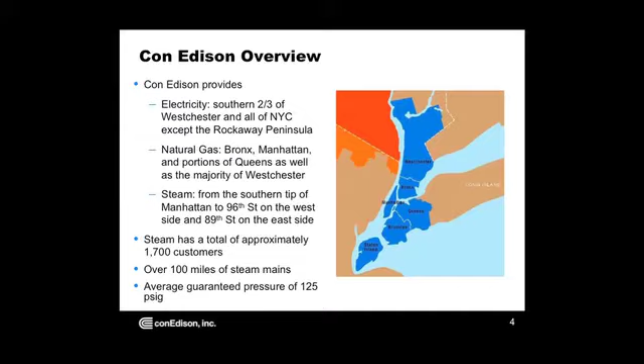We have over 100 miles of steam mains running throughout Manhattan, and we supply steam at an average pressure of guaranteed of 125 pounds gauge. So that gives you an idea of what Con Edison does, and just a little bit of basics about district energy in Manhattan. It's a large system. It spans quite a wide expanse through Manhattan, and some of those areas of steam mains are located, obviously, in areas on the extremities of the island. And as you can see from this image, there's quite a bit of water surrounding us from all sides that has the potential to impact us at varying flood levels.

So before I get to the flood-prone areas, just to give you an idea of our generating capacities, this table summarizes our stations. So we have the 59th Street station with a capacity of just under 1,400 M-pounds per hour, which is about 12% of our system. 60th Street station, which is part of the 74th Street complex, 720 M-pounds per hour at about 6%. 74th Street station at around 2,000 M-pounds per hour. That's about 17% of our system. The Brooklyn Navy Yard at 920 M-pounds per hour, about 8%. East River Station at a little over 5,800 M-pounds per hour, coming in just over 50% of the system.

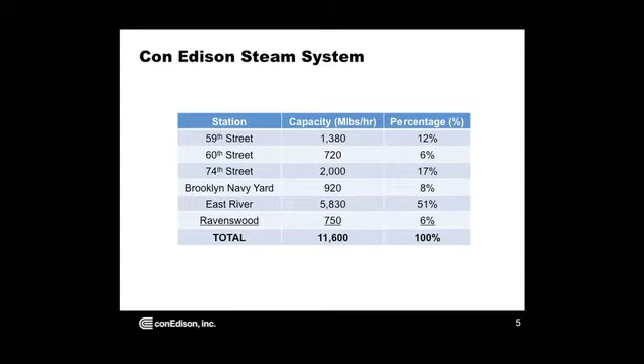And Ravenswood Generating Station at 750, which is about 6% of the system. In total, we have 11,600 M-pounds per hour capacity of generation. And this is going to become important later when we show you what the impact was to our system and what we took out of service preemptively, as well as what was impacted by far greater than predicted flood levels in our generating stations.

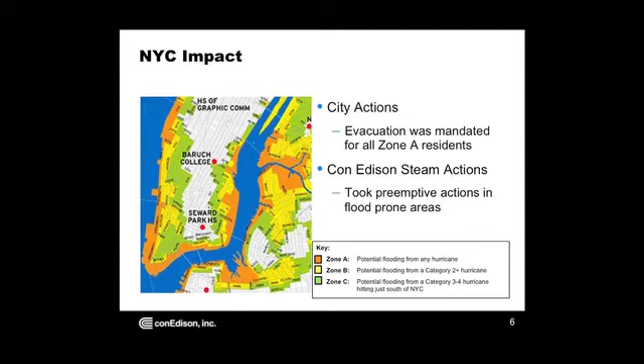In terms of ourselves, Con Edison took some preemptive actions in these flood zones that we'll talk about more in detail shortly. So right now I'm going to hand it over to Rob Boyle to talk about some of the actions that we took in the street, and then Mike will talk about the actions that we had in some of the plants.

All right, so as per the Con Edison corporate procedure, we begin talks 120 hours in advance of any potential storm that may hit the area. In fact, I remember, I think it was the Thursday before that, we were actually on a conference call with some folks from Veolia up in Massachusetts and also down in Philadelphia. And at that time, we knew it was coming, but we didn't know where it was going to hit, and everybody was kind of scrambling to develop their own plans.

So we start discussing those plans in advance, but as it looks like the track is going to be heading into us, we start taking the necessary precautions that are identified in our coastal storm plan. Fortunately, we had a good experience the year before with Hurricane Irene, where we had to enact our coastal storm plan, so we were able to go through it and use the lessons learned from Irene as part of this preparation.

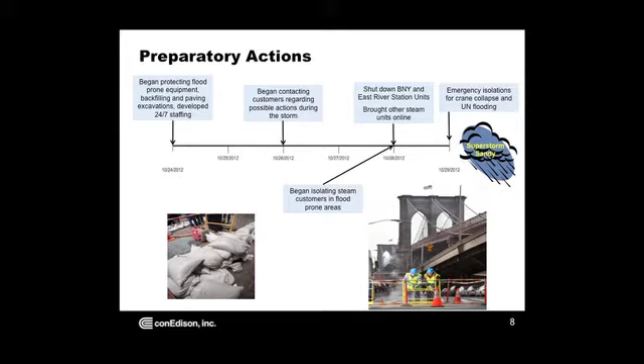So just to take you into it, this is all of our preparation. Here we are. We've sandbagged ourselves in. We've got folks throughout the stations and in distribution staged with trucks at ready locations in case we need to drop portions of the system. We're watching the tides come in. It's about 8 or 8:30 at night, and the surge just keeps coming, and it just keeps coming. So let's talk about what actually transpired with this storm, right?

Let's talk about some statistics. We're calling this a superstorm for a reason. Superstorm Sandy wasn't just one storm. It was a combination of multiple front systems that, when weather folks talk about it, it literally is a perfect alignment of conditions that allowed these two storm systems to merge and settle and just sit right over top of the New Jersey, New York, New England coastline.

At its widest, it spanned nearly 1,000 miles. It was the largest Atlantic storm on record. We had sustained winds of 64 miles an hour at LaGuardia Airport. That is very significant. There were peak gusts of 90 miles an hour on Staten Island. Who would have ever thought that?

And remember, I mentioned what the forecast had been for the storm tide or the storm surge. They had been predicting at a maximum that we would hit 12 feet, and that was the highest that we'd seen, maybe just a hair over. The actual storm surge hit a little over 14 feet. That's in excess of 2 feet greater than what was anticipated.

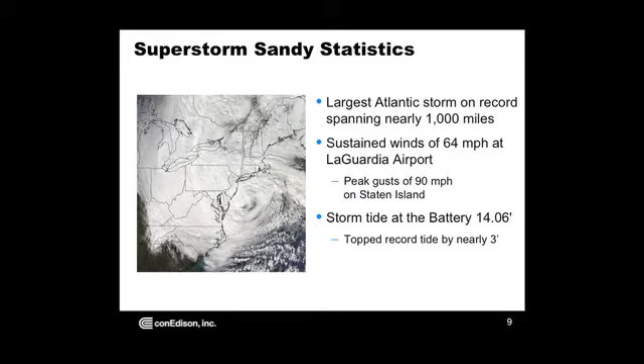So let's talk about the impacts just in general. Let's back up and look at Manhattan as a whole. There were 11 electrical networks impacted as a result of the storm in Lower Manhattan. It took out everything below about 42nd Street. Tunnels were flooded. There was debris all over the harbor. It was floating up into the streets, and we'll show you that in a minute.

One of the most significant impacts for transportation for the city was the Brooklyn Battery Tunnel, which connects Lower Manhattan into Brooklyn. It was completely submerged. Millions of gallons of water flooded this tunnel, and it stayed that way for quite some time. In fact, it was weeks before this tunnel was reopened to public use.

From our perspective, from a steam perspective, the impact to the electrical networks Rob mentioned in Lower Manhattan was significant to us because of the effect of loss of power on our customers; there's a potential for loss of condensate pumps. So that was a concern to us as well, and we'll talk about that in a minute. But let's look at just some more general photos of how the city was impacted.

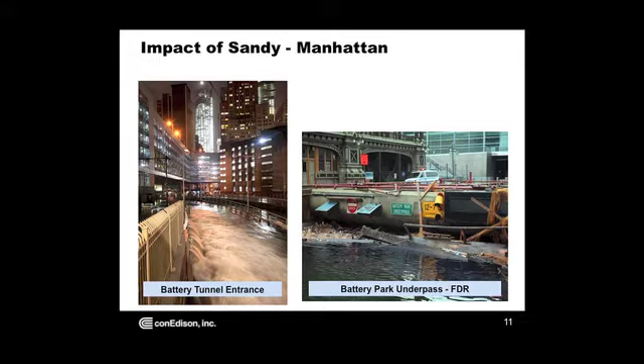The battery tunnel is in Lower Manhattan. This is primarily where the main flood areas were, if you noticed from the flood maps earlier. Here you could see just water gushing and pouring into the tunnel entrance. This Battery Park underpass is a method to traverse from one side of the island down there to the other. That was completely flooded out. Unless you had a scuba, you weren't going in there.

Can I just chime in? Go ahead. Yes, so with all this devastation, we also had to be very sensitive and work with our employees. There were restrictions getting in and out of Manhattan. Gasoline was a big issue. So our folks who went home at night, they had a battle with either having somebody at home get gas, 5-gallon gas cans, whatever it may be, or wait on gas lines to get back to work.

So, you know, you see all this devastation, the impact to our employees, and then a lot of our employees had damage at their homes themselves, struggling with phone calls, contractors, tree removal services. So at every level, this impacted everything that we do and what we would consider normal. So I just wanted to chime in about the impact to our employees as well. Thanks, Ed.

And so now we want to focus in more on steam specifically, right? That was kind of a general impact to the area, to the region. We didn't even touch upon the devastation in the shore of New Jersey. There was significant impact to Manhattan, which is where we're primarily focused because the steam system is only in Manhattan, but there was devastation in Staten Island, in southern Queens, in Long Island.

There were areas that were literally destroyed. And if some of you have seen CNN or any of the news media outlets, you've seen photos of just homes decimated. But let's move in. So closer into the steam system, our impact primarily was in terms of shutdowns and isolations and return time, and cleaning off equipment that was impacted by the flooding.

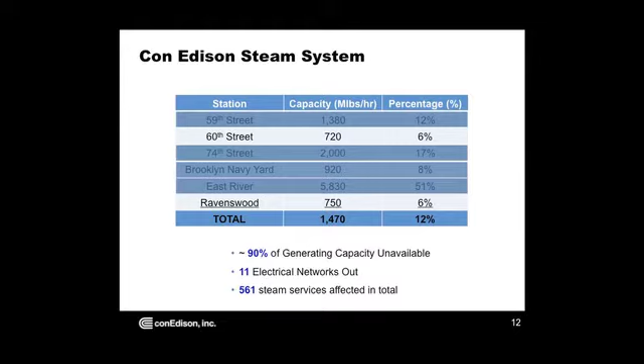In all, we also took measures to isolate a much larger portion of Lower Manhattan. And by the end of the day into the next, as we were recovering out of the impacts of the storm and assessing the system, we had 561 steam services affected and isolated as a result of this storm.

As the 74th Street plant and the 59th Street plant were losing their generation ability the night of the storm, we had plans in place with crews manned at certain valves to drop additional sections of the distribution system. And that call came right about the time that we started to lose electric power also in these networks. So it was all kind of happening at the same time. The plants were coming offline, the electric networks were starting to get shut down.

So we had two valves, one on the east side of Manhattan, one on the west side of Manhattan. They ended up getting closed, and that basically dropped all of our steam systems south of 14th Street. And that was done to maintain the pressures as they were severely dropping right at this time. So we were able to maintain them at a much lower pressure, but we were able to ride out the night by dropping that additional section.

And just to add a little bit to the sense of impact across the region, not only was this a significant impact to us, but the harbor itself was closed. And this kind of speaks to why fuel was so unavailable, that we couldn't move barges around in the harbor, that the harbor was closed for nearly 3 days. There was debris floating everywhere, and the Coast Guard did not feel it was safe to move and navigate vessels through the waterways.

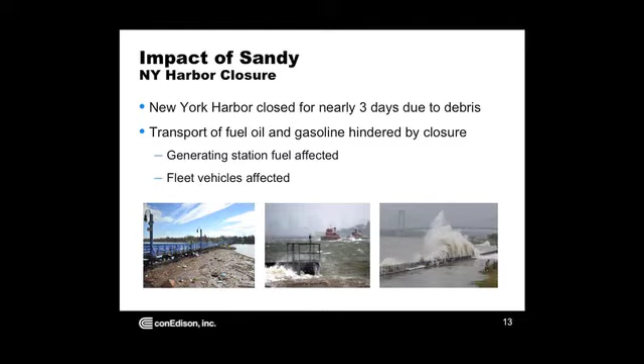We had evacuated our security folks in the lobby, and we brought them up to the 5th floor, and about 15 minutes later we ran downstairs, and you had a foot of water that generated in that 15 minutes inside the lobby. And then it was just a race from how quickly this surge was rising, and everything started around 6 or 7 o'clock at night, and peaked out around 10:30, 11 o'clock at night. And by 1 in the morning, the water was gone. That's how fast it came in and went out.

So I'm going to segue into the video.

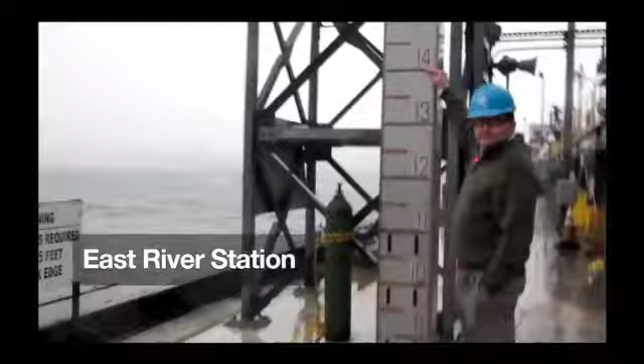The highest flooding ever recorded in New York was 1821, and it was like 11.2 feet. We went to 14 foot. The surge. This was the recorded surge that night, Monday night. So when the floods came in, we didn't have lighting, we didn't have sewage, we didn't have water, we didn't have heat. We're completely black.

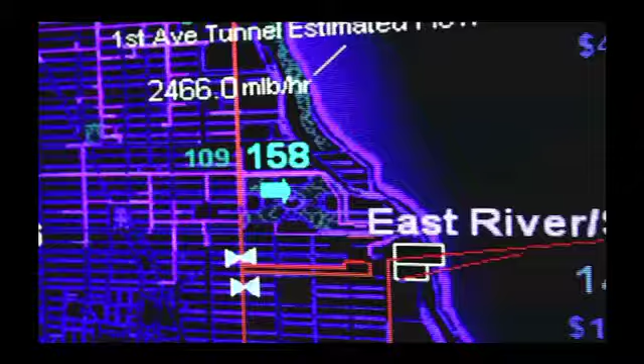First thing we did was reestablish lighting so we could see what the damage was internally. And our plant was designed for the worst case scenario. Most plants are designed to have a 100-year flood. We were completely encircled by about 5 feet of water out in 14th Street. And I was looking outside the window and watching this occur right in front of my eyes not too long after we lost all our power.

We're not paid to get scared. We're paid to react. So got in touch with Steam Ops OEM, Rich Iacco. I said, I got a gate for you to get the troops in here. I called them up, and then we went to the Avenue D gate, and folks started coming in from electric ops, substations, steam ops. And right after that, we were on battery power for all auxiliary lighting, emergency lighting.

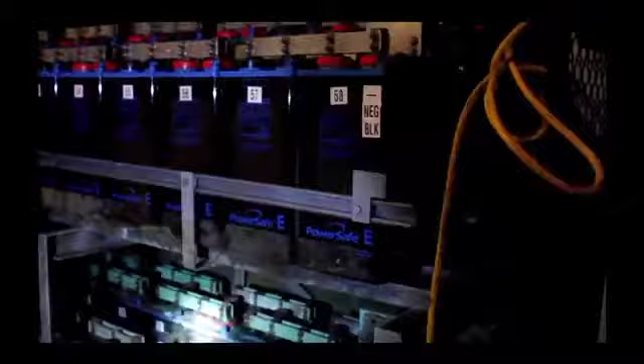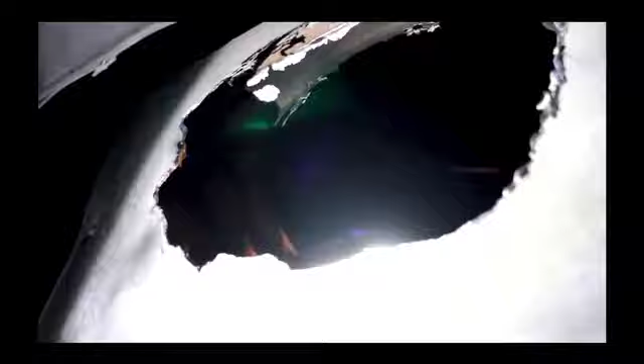See the water level? This actually started showing up as white and corroding like a day or two after the water receded. Now salt water just goes to town on it. See all the damage that happened? That's 13.8 kV, stepped down to 2400 volts, and it blew this whole compartment apart. You were up to your chest, shoulders in water here. And all you needed was establish ground, establish a circuit, and away you go.

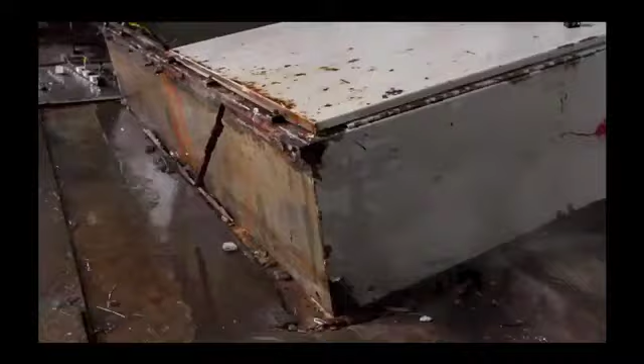We had plywood here. It blew the plywood through, came in here, and knocked this flat on its back. It blew it right over. And you see how it pulled all the conduit? This is all metal conduit. Water was up over here. That's how high up it was. And our 100-year flood design was down here. And the waters were coming over this capstan.

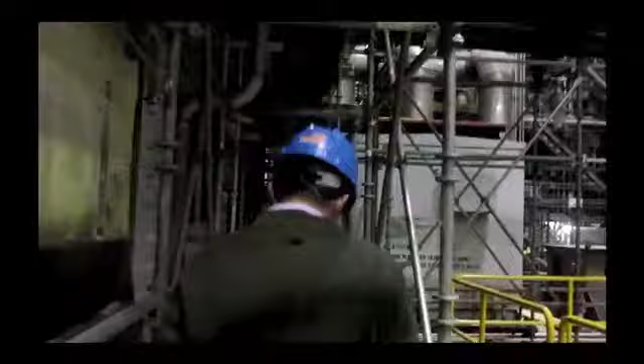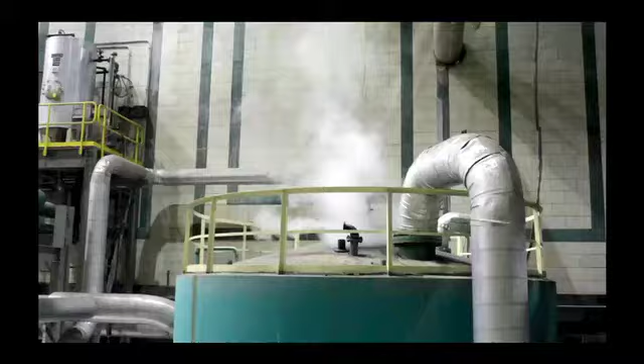We had about 70 people in the plant, and thank God we had those 70 people in the plant because they de-energized the whole plant to avoid a situation where we could have had further damage. So we got one unit in Sunday night, second unit went in Monday night from Tuesday morning. One unit, East River 10, 180 megawatts, and East River 20, 180 megawatts.

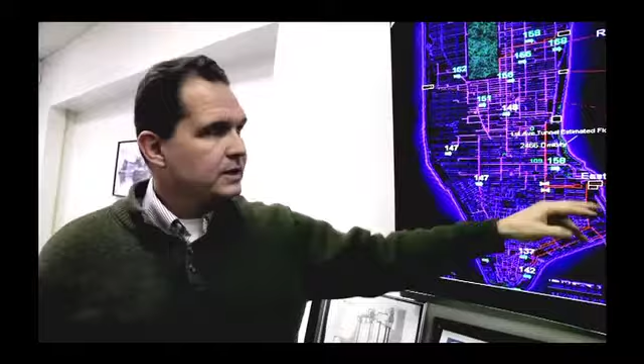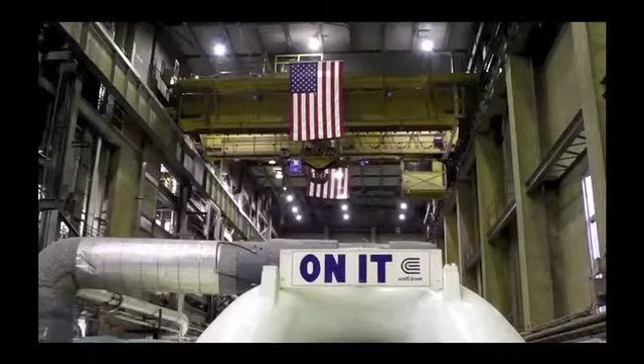Number one, the goal is now we have the assets that we can supply our customers. Now we're turning on customers. So once that happens, we can increase our load to support our customers. And we still have two other units that can supply steam. We're in the process right now of getting those assets back, Unit 6 and Unit 7. So we'll be ready for the winter load. We will make it.

So as you can see, the stills you see on slide 15, that was the morning high tide. Obviously, it was definitely not what we saw later that night. But as you can see, it was kicking up pretty well, and it was actually about a block into the street in the morning alone. And the extent of the flooding went for about 4 city blocks into Manhattan from where we were. The FDR Drive, the easternmost drive along the river, was part of the river. And there were sections, like I said, about 5 to 5.5 feet surrounding the entire plant.

And the winds were driving pretty much all the piers from the Brooklyn side across due east to west over onto our pier. We had to get almost 20 laborers working around the clock for about 3.5 days just to clear this whole area on the dock that you see right now. You couldn't walk on that dock during the aftermath of the storm.

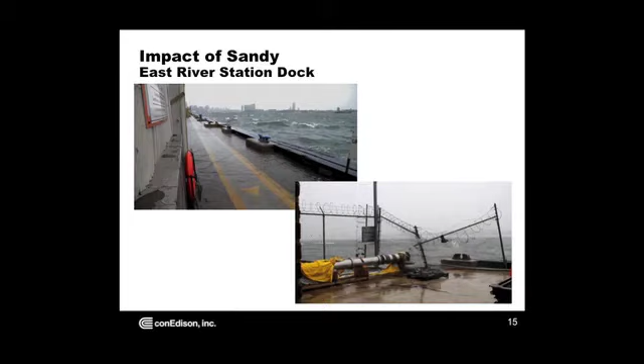Okay. So just to add a little bit more, this is 59th Street. This is looking down from an upper elevation into part of our Demin plant. And as you can see, the picture on the left is during the flooding, and the picture on the right is afterwards. And basically, you're looking at about 4 feet of water in the basement.

Some of the key challenges became a lot of our motors in the station became inundated with salt water. So replacing and doing megger tests and drying them out to make sure that they were able to go into service became a critical piece. As Mike mentioned, a lot of the preparation. So also about 3 or 4 hours, the storm started hitting about 7 p.m., 8 p.m.

The amount of water that came in, and we had contingency plans to isolate transformers and feeders and lighting panels. That all occurred during like a 3-hour period. So you can imagine during a 2 or 3 hour period that you had no water in the basement, as you see on the right, and all of a sudden you had major pieces of equipment underwater.

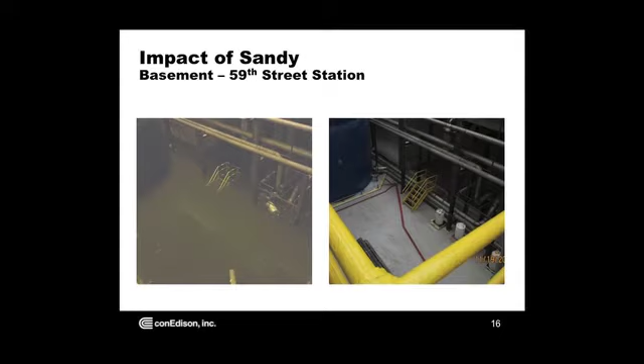We contacted a tug company, which we have contracts with, brought in 2 tugs, and pretty much pinned that barge up against the pier. And the good news was, it was fully loaded, so it didn't go over the pier. So we thought that was a very good strategy, and we developed that in preparation for the storm.

The other critical piece of information is the Coast Guard requires that we disconnect our cargo hoses from the barge to the pier that goes into the station when we get sustained winds above 50 miles an hour. So we were hoping that we wouldn't lose the station, but there were periods of time where we were managing fuel because we had to disconnect those cargo hoses and wait for the winds to go down.

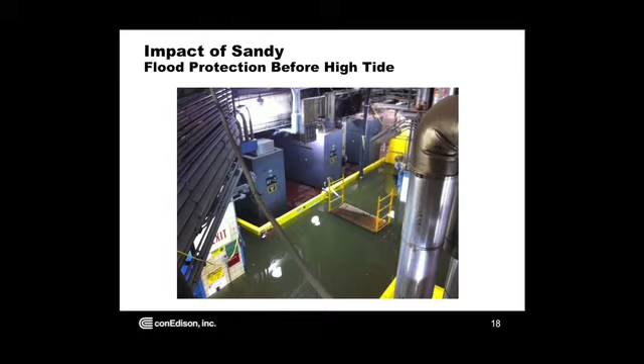This just gives you a sense that when the flood protection is protecting you against a flood that's below your flood protection level, it works very well. And this storm more than exceeded our flood protection levels significantly. So our preparation is good, but this storm really brought us some scenarios that we had never seen before. So we actually went a foot and a half above that flood wall.

We had one pump to keep the system in service here, and we made an operational decision to continue to operate that steam-driven pump, even though it was compromised with the flood level, because the bearings in the pump, in the motor, and the governor oil were all compromised. We had to actually keep a water supply to keep the pump fully submerged as a cooling mechanism.

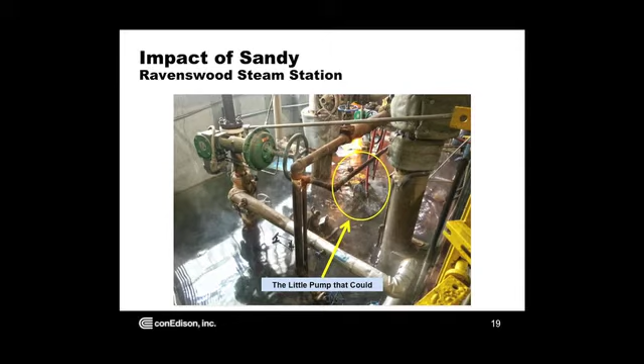And this is one of the two plants that stayed in service in a very obviously limited condition. And folks, if you're ready on that end, I think we have a little video just to show you this pump in operation.

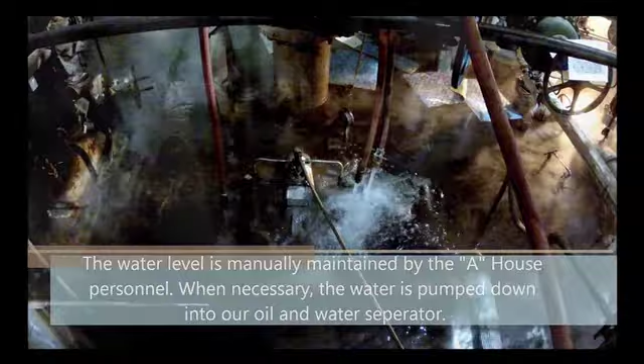We had about 12% of capacity on the system. To move on, just to give you a sense of the amount of equipment, or the sheer numbers: we had backup power systems, several compressed air systems, many breakers and transformers, valves, instrument panels, and over 300 pumps and motors that had to be removed, cleaned, baked, tested, and returned to service. And we were able to do this and get a majority of our system back within a number of days.

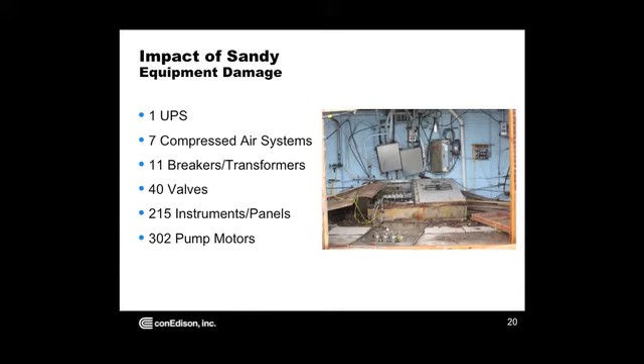And now I'm going to turn it over to Rob to talk about the street perspective and some of the impacts in the field. So the next morning we start thinking about restoration efforts. There's a lot of issues to deal with outside on the streets of Manhattan. One of the big differences between this storm and Irene, which we had in August of 2011: with Irene, we ended up getting 7 inches of rain in a 24-hour period. With Sandy, believe it or not, we had less than half an inch of rain. That was good, so we didn't have to chase a lot of flooding issues in non-flood-prone areas during the storm.

But we had tremendous winds and flooding, and in some of the pictures you see there, I talked about the crane collapse. That's the crane that was dangling over Midtown. Debris, that's the FDR Drive. You can see the UN in the background. Just major thoroughfares were closed. Building facades had come down. Street lights. We're not an overhead area in Manhattan. There's a lot of overhead damage in some of our other operating areas, but everything is pretty much underground, but we had a lot of obstacles to get around.

We had flooding in streets, in our structures and at customer locations. Of course, no lights, so a lot of the work we were doing for the first 3-4 days was done in daylight, and no traffic lights in Manhattan, so if you can imagine what it was like trying to get around sections of Manhattan with no traffic lights, it was chaos. Weather: it was late October, but it was cold, and a few days into this, we actually had a nor'easter come through the area and hit us with some snow and some real cold weather, which just further hampered our restoration efforts.

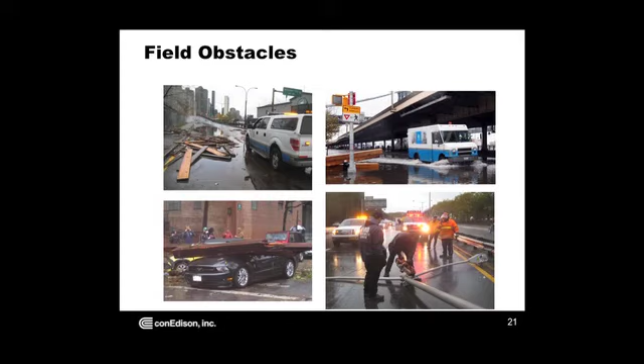Just to recap the customers, we had isolated all of our customers in the Category 1 and 2 flood zones. That impacted 130 customers. When we lost the 2 additional plants, we dropped another 15 miles of main below 14th Street, and that impacted another 236 customers. So now we have about 30 miles of mains in our distribution system, just about a third of the system, isolated. The electric power was lost in 11 networks below 42nd Street, so although we had steam in certain areas, there was no electric. We had to isolate those customers for fear that they wouldn't have pumps operating, and that was another 142 that were impacted.

Finally, as the weather got colder, we had to curtail some of our largest customers north of 42nd Street, and that was another 53 customers, just so we could keep the rest of the system running during those days. So that's the total of 561 customers that were impacted. We set out to prioritize how we're going to restore our services and mains, and set up all our support from our construction services, which is a labor crew within Con Edison that really provides a lot of our pumping support. We needed our engineers to restore the mains. Gas wasn't impacted in this storm, so we did get resources from our gas operations group, and we had a multitude of contractor support.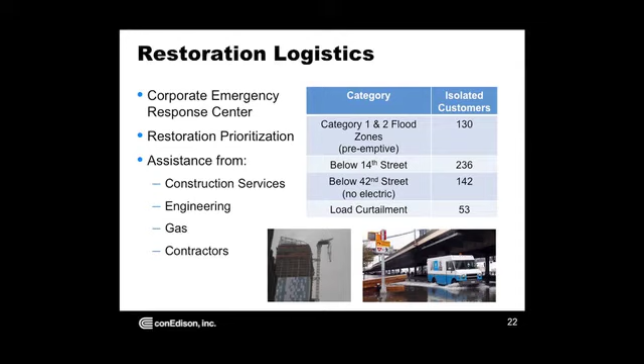Restoring the system. We had, as I said, almost 1,000 structures in that area that had become flooded, and we had to set up a plan to sequentially restore these 30 miles of mains. So although we had enacted 14 MSOs to shut down, the first 2 plants, with all of these additional outages we had to do, we had to come up with a plan on how we're going to bring these 30

miles of mains back. And it involved going to every one of the structures, inspecting them to see if there's any damages, pumping out the structures, cold draining the mains of condensate, repumping the structures again, and then getting the okay from our energy dispatcher to start introducing steam back into the system. We prioritized the mains based on which stations were going to come back, so we had send-out mains available that would align with our generation returns.

We had certain transmission mains on the east side and west side of Manhattan that had to be brought back. We also looked at which mains would bring back the largest number of customers. The critical customers, we had some hospitals that were impacted, which were the most impacted areas where flooding occurred and would probably take the longest time to return.

And also we had to continue to look at our system pressures. So as we brought mains back and restored customers, we had to make sure we had the generation supply that was there, so we didn't create a condition where we were creating low pressure again by bringing more customers back on. Once the mains were energized, we then could use our steam distribution services crews to start restoring customers.

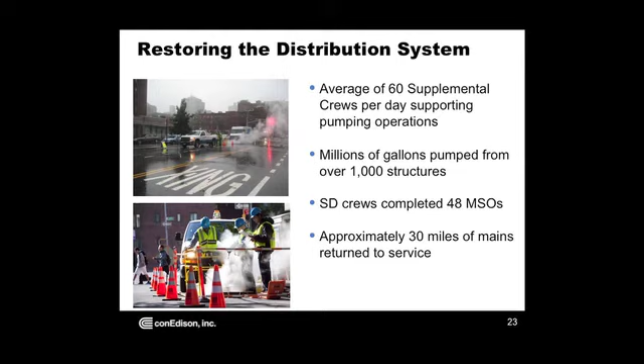And a lot of the crews that we got supporting us in the pumping operations, the electric service was restored a good part of it in Manhattan by that Friday. So we were able to then start getting some of the crews that were supporting the electric groups to come over and start supporting steam as we were getting ready with our plant.

On slide 24, it just gives you a little pictorial of the timeline and our system generation. So the blue bars are our customer outages, and they started when we started isolating customers on the 28th, and you can see they peaked right during the storm, actually the following day when we isolated the additional customers, so they peaked at 561. And the red line signifies the percentage of generation that we had available. You see the dramatic drop leading into the storm, and then a gradual increase as we got to November 4th.

One of the plans we had from that period, from the 29th to the 4th, was we had set up an intermediate pressure zone across 42nd Street, Manhattan. So what we had to do was we shut every one of the valves feeding the southern part of Manhattan and opened up the bypasses. And then each day we'd have crews positioned on those valves during the morning loads just to see what kind of loads were developing. And we would actually be ready to shut the system down south of 42nd Street if we saw that the pressures were dropping.

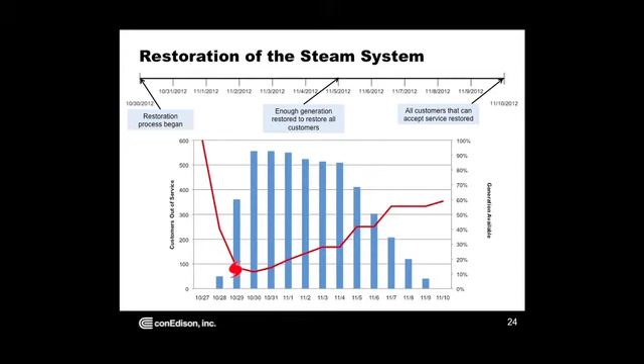There were 49 customers that were not ready to receive steam because of the significant damage that they incurred inside their premises, and we're still working on restoring a handful of those customers at this time. The communications plan is very important with our customers. I'm sure you've heard a lot about what's happened in New York and the responses of keeping our customers informed. I do take pride in steam. We were at the forefront advising them in advance of when they would be isolated.

So by Friday, we were giving them letters, emails, voice response units, sending out messages, advising them when they would be isolated, and an expected return. As we got updates on the systems and the weather and the return of our plants, we were able to give a little more refined data on when certain customers would be able to be restored based on the return of the main that they're being fed off. Updates were continually sent out to customers. Hundreds of phone calls would come in each day.

Christina handled a number of those in our CERC office, and I won't say it was perfect in the first few days, but by the end it worked out a good system where if somebody called up she could call down to the operations group, get a pretty good answer of when we expected them to be returning, and get that answer back to either the municipal agency or the customer. So there's some lessons to be learned in communication, and we're going to work on that in the future.

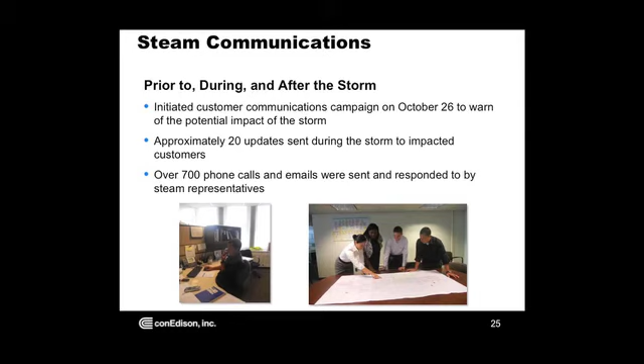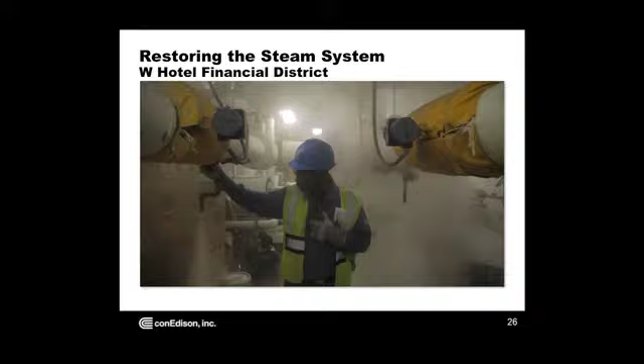Now I have just a video. This is the good part of the job. This is two of our mechanics, Carl Burrell and Ronzi Broxton, and this is the end part of when a customer finally gets their service back on.

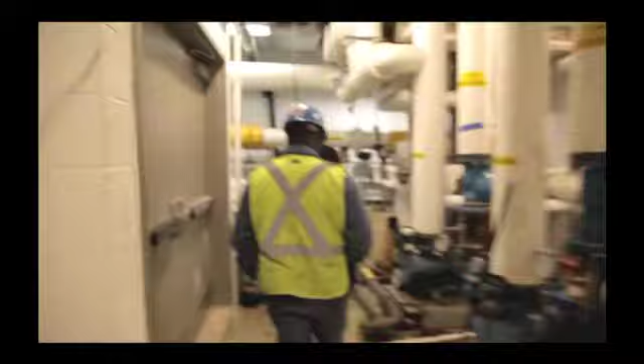Well, I'm here to turn on the steam to the service to the building. So I have to be downstairs while my partner upstairs turns on the valve, and I'll monitor the steam pressure that's downstairs. And I'll let them know how much turns to give me. They're gonna be happy, all right? They're gonna have heat, hot water. The pumps are running, right? You got electric on your pumps? Yeah. All right. The pumps right here. But what we're gonna do? We're gonna turn on up to your house valve, okay? Okay.

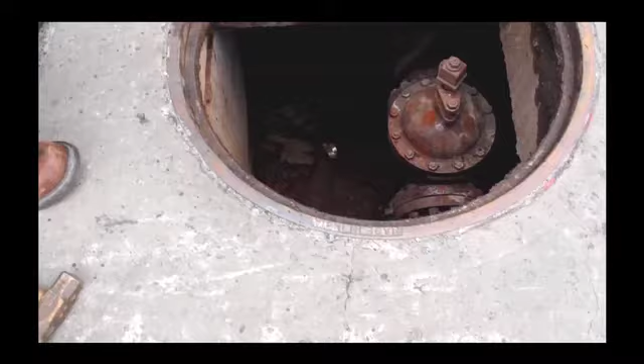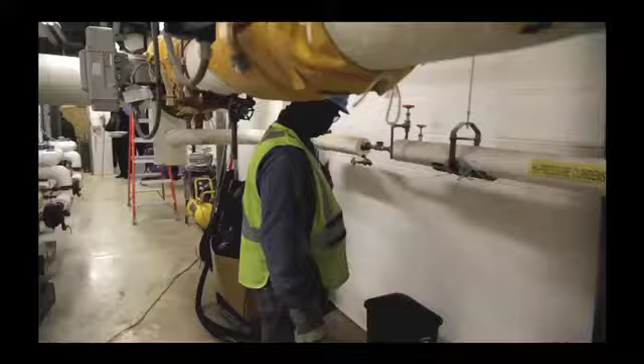Dry. Okay, Braxton. There you go. Crack the valve. Move it on. Nothing yet, Braxton. Go ahead, give me a little more. He'll be there in a sec. He was on the phone. Another happy customer. Thank you very much to Con Ed. Give me some heat, some steam. See you, man. All right, later.

So it's a hotel, so now they're very happy, you know. They could take their showers. And now they'll have business, more business. It's very good. I'm happy for them. We're just gonna move on to the next location and do the same thing all over again.

Okay, so you heard about us being impacted by the storm, preparing for the storm, being impacted in our response and our parallel efforts to get things back as quickly as possible. One of the things that we just wanted to touch upon briefly was impact to our steam business from climate change. Obviously, we had two storms in two sequential years, one far exceeding the previous one, which was historic in its own right. What does climate change mean for us? We've worked with our weather folks, and I think everyone would agree that it's very difficult to assess where this takes us because the deltas in what you could forecast could be so extreme.

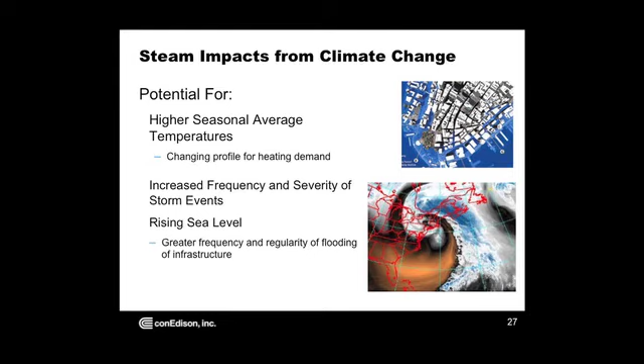Another example of extremes, if you look at the last 50 years in our area about tornadoes, we've had more tornadoes in the last 10 years than we had in all the last 40 years prior. So we definitely are seeing a change in the severity of storms of all types.

And just to give you a sense of the financial impact for steam operations alone, and this isn't even counting the rest of our commodities at Con Edison, the full all-in impact of restoration from the storm for steam operations has been estimated at $35 million, and that's just to put us back to where we were before the storm hit us.

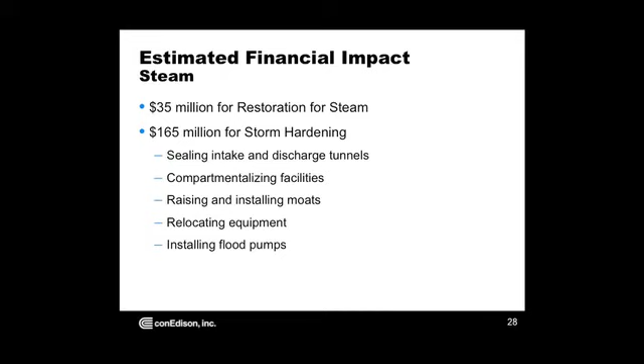In going forward from this, we're proposing around $165 million for storm hardening, and that involves sealing intake and discharge tunnels, compartmentalizing facilities, raising and installing moats, relocating equipment out of the new or historic floodplain areas, and installing submersible flood pumps.

And so the next few slides just kind of give you a visual of some of our more immediate measures that will be implemented more quickly than others, including sealing the lower portions of facades. So this slide gives you an idea of how we might forecast sealing the perimeter around our facilities.

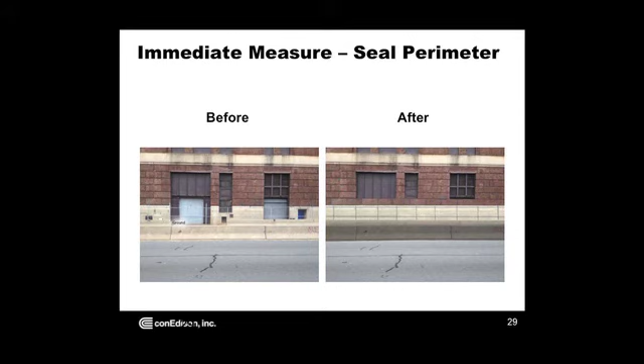Another example of immediate measures are installing floodgates at some of our entranceways, and this is a system that should be relatively simple to install and provide some additional protection so that we could place sandbags additionally internally to keep the floodwaters out.

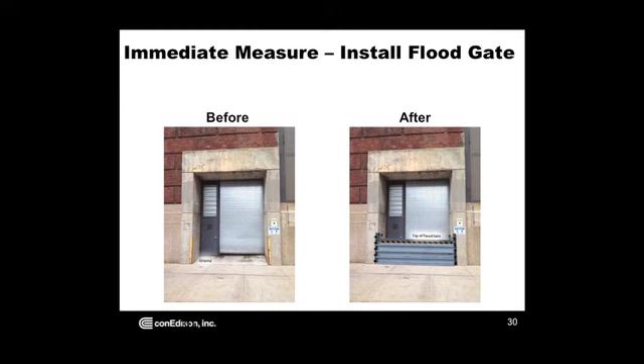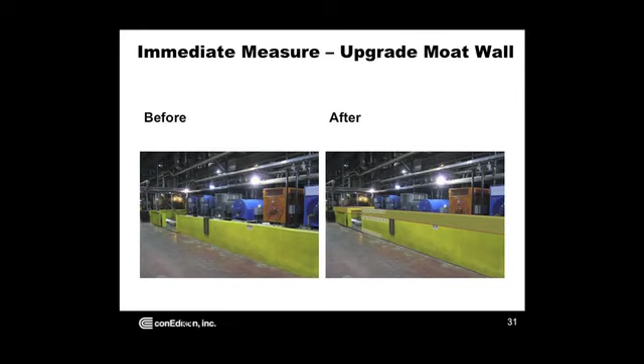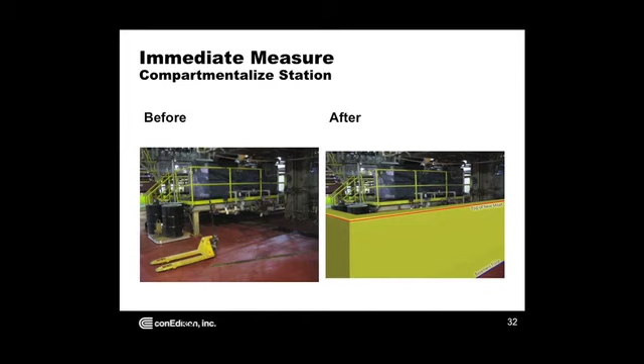If you look internally, again, we mentioned the moat walls, increasing the head space on these or increasing the walls can also provide some additional flood protection that we should be able to implement in a reasonably quick time frame to get us in a better zone. Additionally, adding flood protection moats where there has not been any need before. So we're looking at all of our facilities to include these items.

And to just summarize our concepts, evacuation and system de-energizing plans, no matter how we revise them, need to be practical and safe, no matter what type of flood protection levels we're considering.

We need to be in concert with whatever is proposed by the city and the state for local area flood protection. So while we have our own concepts of what we think are near-term solutions, there are probably also going to be more widespread requirements that may cause us to take different measures than we've already taken. So we're looking to see what those are so we can finalize plans for anything beyond the immediate items that we think we can do to protect our equipment internally.

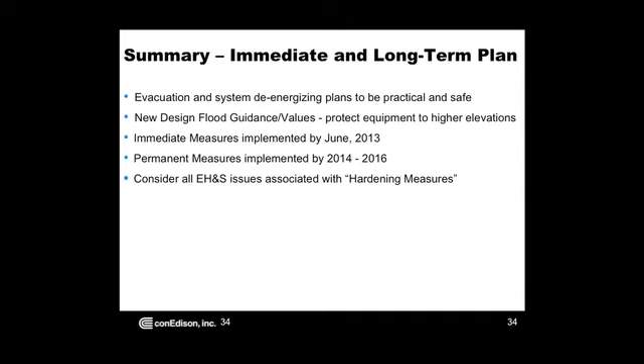And then obviously with any measure that you project and install, you got to consider the environmental health and safety aspects of it. You know, are you building a moat wall that now encompasses your entire basement, and now you've created a space that maybe you need different ventilation for? So there's many aspects of this that need to be assessed to move further and further down the road, depending on what targets we set for our hardening goals.

And just to kind of wrap it up towards the end as we go towards questions, we just wanted to give you a sense of the magnitude of the logistical issues and lengths we went to get resources for our entire company. While steam was able to work with the resources we had internally, electric needed resources from all over, and there were resources allocated all up and down the eastern seaboard.